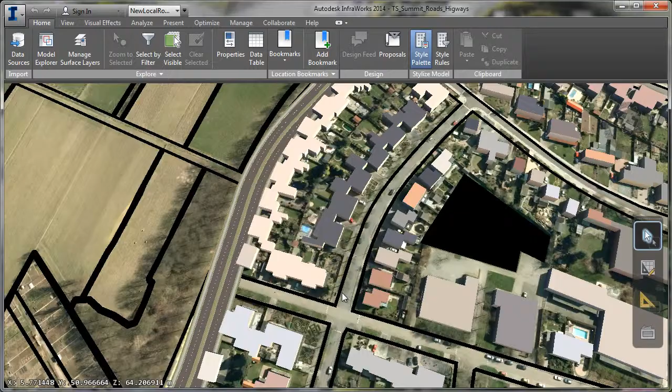Getting to 30% with Autodesk InfraWorks. Efficiently generate preliminary plans. In the early stages of infrastructure project development, teams are typically working towards the creation of 30% plans. These plans can be used to confirm scope, budget, and schedule. Design work at this stage with a high level of detail is often cost prohibitive, so in the past, preliminary design reviews often relied on low detail, static 2D plan sheets.

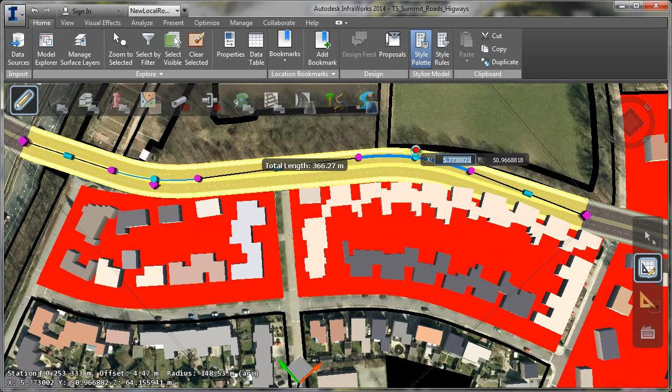One of the goals of the 30% design review is to ensure that the design team is on track, as well as understanding what pieces of the project would require things like right-of-way purchase or special permits, so that the processes can begin alongside the design and not cause a bottleneck later. Right-of-way acquisition needs and impacted land types are considered as part of the decision-making process at this stage.

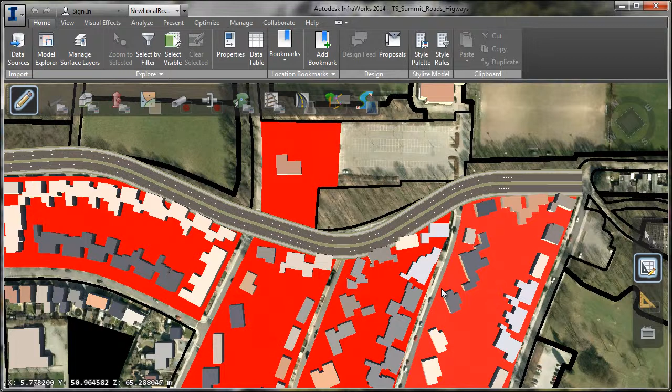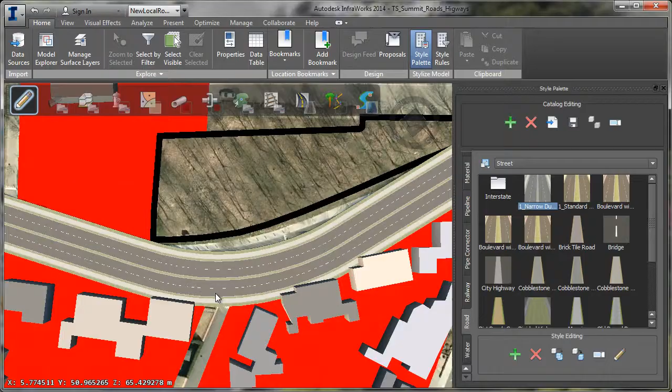In this scenario, I've used analysis tools in InfraWorks to identify several parcels that would be expensive to purchase. I can work through different alignments and lane configurations to find an alternative that avoids impacting these parcels. InfraWorks gives you the power to create functional design models at the appropriate level of detail for early reviews, all within a 3D sketching environment.

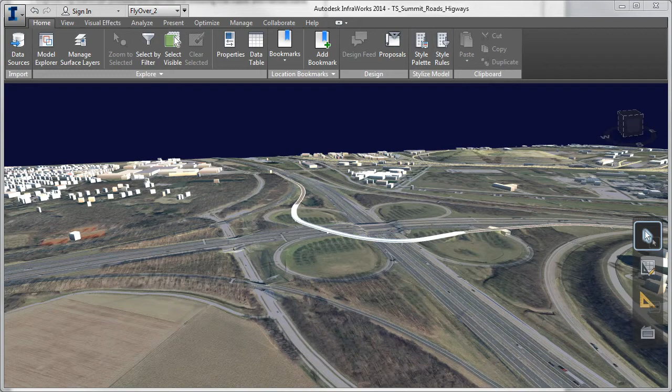Before investing the time producing the 30% submittal package, you can sit down with your client and evaluate the project. Transform review meetings into interactive feedback sessions, making adjustments to the model on the fly. You can more quickly arrive at an effective solution with minimal debate because decisions are backed by information and the robust 3D model helps everyone understand the design every step of the way. The engineering teams can proceed with confidence knowing that the viable alternatives were identified and evaluated.

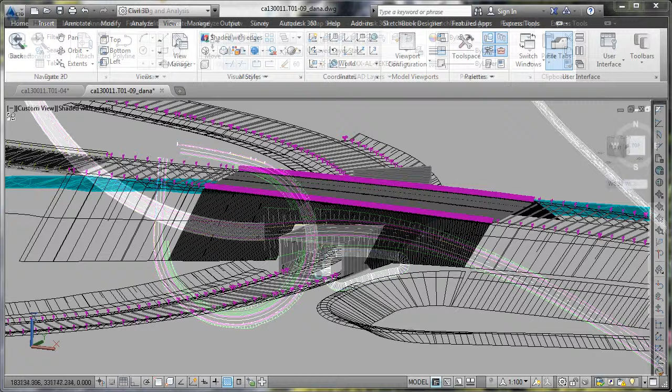The preliminary design model elements can be brought into Civil 3D in order to create the exhibits that are often required for 30% plan submittals. This usually includes approximate right-of-way plans, plan and profile sheets, and a first run of cross-sections. In addition, detailed design work can continue without duplicating efforts, saving your company time and money.

You need Autodesk InfraWorks in your tool chest to enable you to quickly create the level of detail necessary to obtain preliminary design approvals. This speeds up the overall design process and gets you to construction faster.